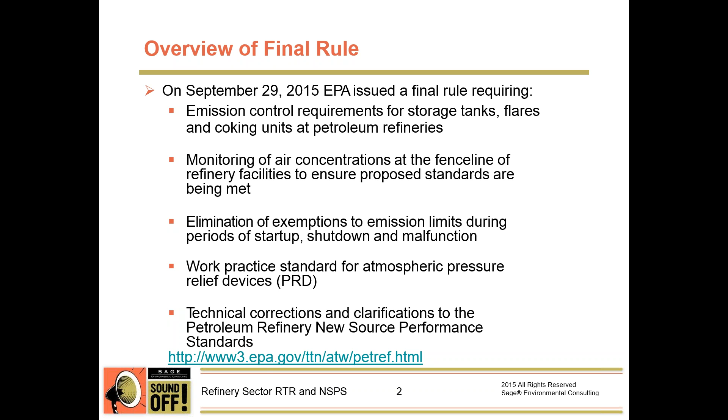Getting into a little more detail, the final amendments to the NESHAP and NSPS are effective 60 days after publication in the Federal Register. We have not seen this come out in the Federal Register yet, but we are expecting it any day. The draft rule, or the rule that was signed by the EPA administrator, is what's available to us right now. We expect that to be the exact same thing that comes out in the Federal Register.

For new sources, they're going to need to comply by the effective date of the final rule or upon startup of that new source, whichever of those dates falls later.

Now for existing sources, here's what we're looking at in terms of compliance dates. For delayed coking units and catalytic reforming units, those requirements are going to be 3 years after the effective date, so that's December of 2018. Flares similarly have a 3-year implementation period, due date of December of 2018.

For fence line monitoring, the final rule took a year away from us in terms of implementation. So those requirements now have 2 years after the effective date, so we're looking at December of 2017.

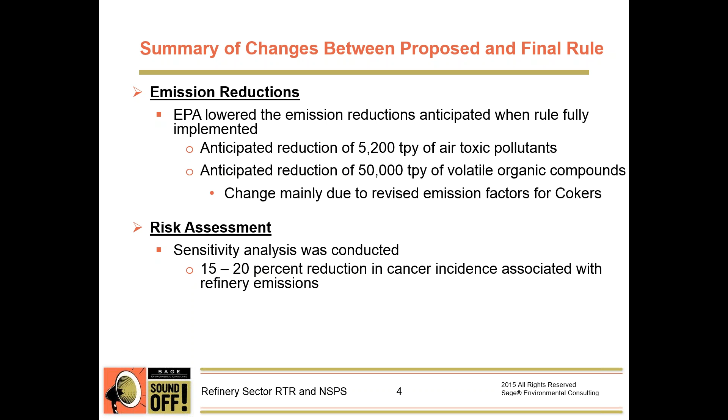On the risk assessment side, there was a sensitivity analysis that was also conducted as part of this. And what EPA has publicized is a 15 to 20% reduction in cancer incidence associated with this rulemaking.

Okay, now getting into the technical details. For flare combustion efficiency, what we now have in the final rule is a single net heating value operating limit in the flare combustion zone. So instead of the multiple ones we were looking at, it's a single value greater than or equal to 270 BTU per standard cubic foot in that combustion zone.

Additionally, EPA did allow the use of the higher adjusted hydrogen heating value, 1212 BTU per scuff, if there is a system to monitor that hydrogen.

Also, we can choose either a 15-minute feed forward or a 15-minute block average to demonstrate compliance for the flares as well. Additionally, what was finalized was limited sampling provisions are allowed to demonstrate compliance for flares that have non-variable flare gas compositions.

For delayed cokers, we're allowed to meet the 2 psig across the coke drums within all existing delayed coking units at the facility. The important part here is for existing delayed coking units, we're allowed to use a rolling 60 event average limit basis to meet that 2 psig across all of the coke drums. Now for new sources, any new delayed coking units, the MACT floor was set at 2 psig on a per coking cycle basis. So for those, we do not have the option for the facility-wide averaging, it's specifically just a per coke cycle basis.

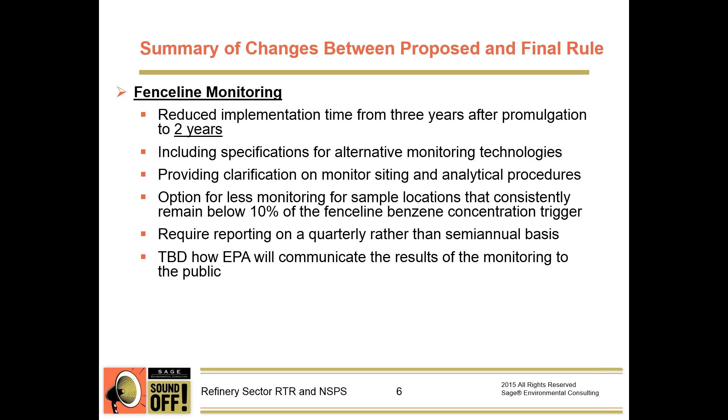This does require reporting now on a quarterly rather than a semi-annual basis, and it's still to be determined how EPA is going to communicate the results of this monitoring to the public. So that'll be interesting to see how that unfolds. EPA discussed that they want input on how this should be communicated to the public.

For storage tanks, the EPA has finalized option 2 of the June 2014 proposal. What that requires is guide pole controls and other fitting controls for the existing external or internal floating roof tanks. These requirements are structured based on the generic MACT for storage vessels, which comes from 40 CFR 63 subpart WW. Additionally, they've revised the definition of Group 1 storage vessels to include smaller capacity vessels and storage tanks containing materials with lower vapor pressures. So essentially encompassing a greater group of storage tanks into that Group 1 category.

The rule also has the elimination of our malfunction exemptions. Work practice standards have now been established for pressure relief devices and emergency flaring. This includes proactive requirements, better controls on the process, instrumentation, operator training, staged relief, and then also will require changes in operations and practices rather than building more flares to control releases. Essentially, they said we don't want more flares, we just want better control of our malfunction emissions.

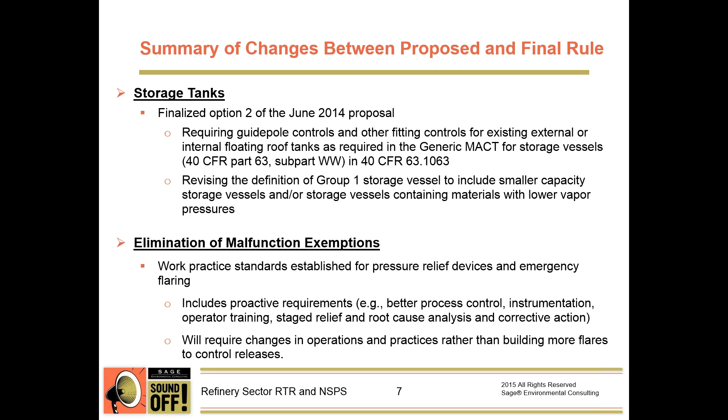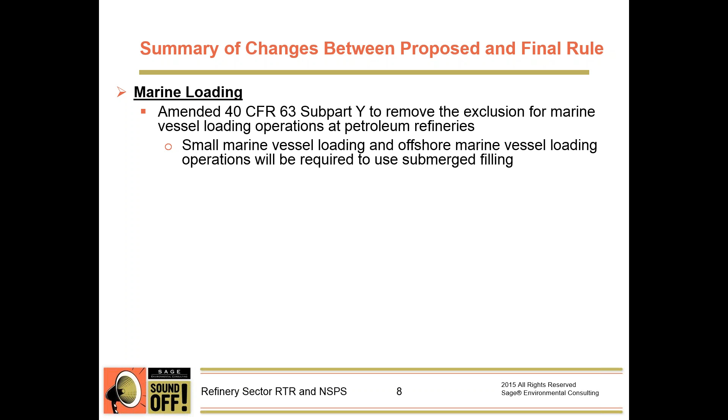And then last here we got marine loading. For any of you that have marine loading, they amended 40 CFR 63 subpart Y to remove the exclusion for marine vessel loading operations at refineries. So small marine vessel loading and offshore marine vessel loading is going to be required to use submerged filling. And again, that is at the time the rule is finalized, so 60 days after we see it in the Federal Register.

For CO boilers, it was specified that the fuel gas must meet the fuel gas standards of NSPS J or Ja. And then they added in bag leak detectors as an option to COMS. So anybody that's got some sort of fabric filter control on their cat can use bag leak detectors as opposed to COMS specifically. We also incorporated the total power and the secondary current operating limits for cat ESPs, and requiring daily checks of the air or water pressure to the spray nozzles on jet ejector type wet scrubbers, or other types of scrubbers that have the atomizing spray nozzles as well.

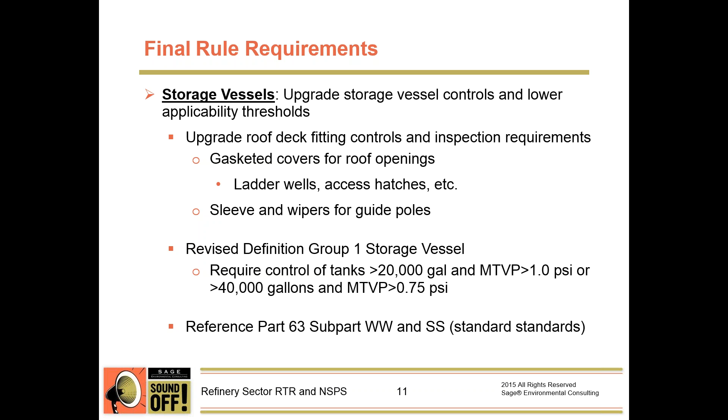All right, so for flares, we've got quite a bit that went on for flares here. It removed cross references with 63.11, and then will operate with a pilot flame at all times regulated material is sent to the flare, and 1 minute with no pilot flame in a 15-minute period is a deviation. And then it did not require the proposed automatic reignition capability for pilots, but you must continuously monitor for pilot presence.

And then you've got to specify the smokeless design capacity and operate with no visible emissions. That's what VE is there. It allows for 5 minutes in any 2-hour period when regulated material is sent to the flare and below smokeless design capacity. And then you can have once per day 5-minute Method 22. And then if visible emissions are observed, you must perform a 5-minute Method 22 and continue for 2 hours if the visible emissions are observed for more than 1 continuous minute. And then it added the capability to use video monitoring in lieu of Method 22 determinations.

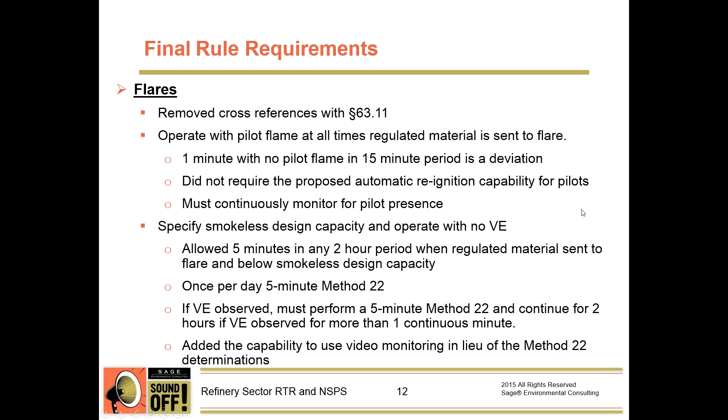So we've got some more flare tip exit velocity requirements. When regulated material is sent to the flare for at least 15 minutes and less than the smokeless design capacity, you've got to operate at less than 60 feet per second, or the calculated V less than the Vmax.

And then combustion zone operating limits, the net heating value of the combustion zone has to be greater than 270 BTUs per scf on a 15-minute block average period. And then the gas must be routed to the flare for at least 15 minutes. They didn't finalize any lower flammability limits or combustion zone content parameters. And then this includes the ability to utilize the 1,212 BTUs per scf for hydrogen.

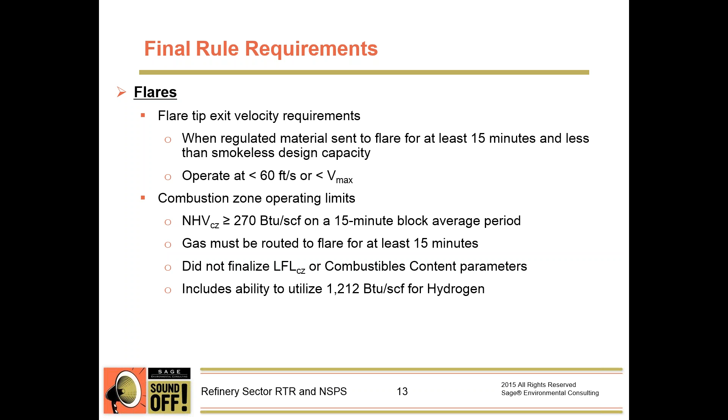So some more on flares. The dilution operating limits for the flares with perimeter assist air. The net heating value dilution parameter has to be greater than 22 BTUs per square foot on a 15-minute block average period, and the gas must be routed to the flare for at least 15 minutes. And then you've got to monitor the composition of the flare vent gas or directly monitor the net heating value, and the potential for separate hydrogen monitoring.

So you need a measurement at least once every 15 minutes. You can utilize a grab sample every 8 hours, or you can do direct monitoring. It's not required for purchased pipeline quality natural gas streams or streams determined to be consistent in composition. And that can utilize a feed-forward method or a direct calculation method.

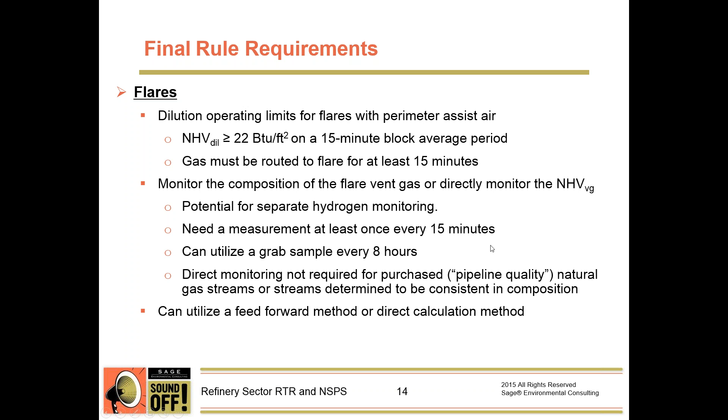So some more on flares. There's a requirement to install a volumetric flow rate monitor on the flare header as well as any supplemental natural gas used. So by installing the volumetric flow rate monitor on assist air or assist steam, you need to separate the monitoring for premix and perimeter assist air, and then you can use a fan speed or a power fan. You can use the curves for that.

Must correct for temperature and pressure to standard conditions, so 68 degrees F and 1 atmosphere. And then mass flow meters can be used, but there are some caveats to when they can be used. And then pressure and temperature monitoring with engineering calculations can be used. And then the accuracy requirements for NSPS Ja and MACT CC were made consistent with the consent decrees. So 20% between 0.1 to 1 foot per second and 5% above 1 foot per second.

So under the emergency flaring provisions, you're operating above the smokeless capacity. You have to develop a flare management plan very similar to the FMPs required for NSPS Ja that is due next month. The root cause analysis and corrective action requirements apply when flow rate exceeds the smokeless capacity. So what would require this is visible emissions present for more than 5 minutes in a 2-hour period, or you have a 15-minute block average flare tip velocity that exceeds the maximum flare tip velocity. And then there is an alternative means of emission limitation and a CPMS monitoring plan.

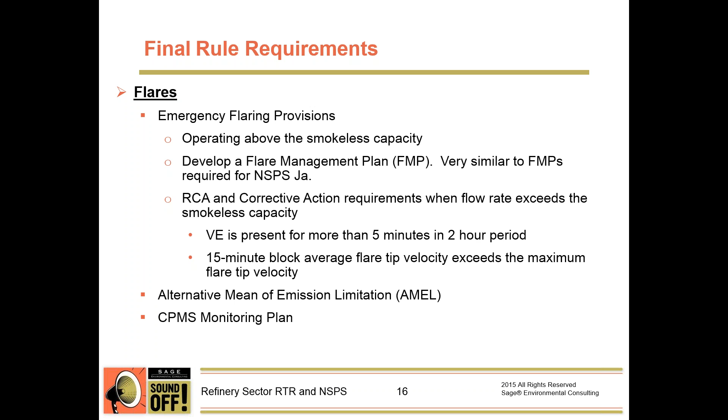So we'll jump over to a couple of the other sources. Flares did take up a major portion of that. But under delayed cokers, they do not allow emissions to the atmosphere from the steam vent until the drum pressure is below 2 PSI. They did allow averaging to meet the 2 PSI across existing coke drums at a facility. That is, again, on the 60 event average limit basis.

The new source MACT floor will be 2, so any new cokers will have to be below 2 PSI. And there's no facility-wide coke drum averaging period. And then the revised refinery emission factors and costs are based on the additional info that was received during the ICR. And then the catalytic reforming unit vents, so vessel pressure limit exclusion of 5 PSI to apply only to passive depressurization. And then their active purging of the CRU will need to meet the emission limitations in Table 15 and 16 in subpart UUU at all times regardless of pressure.

So the fence line monitoring was probably one of the most commented on sections of this rule. I would say that EPA did look into some of the comments and disagreed with a lot of the comments, but we'll go through what some of the requirements are. So you have to deploy passive monitors surrounding the refinery at the fence line. Use a 2-week average concentration reading, calculate the annual average benzene concentration, and compare that against an action level, which is 9 micrograms per cubic meter. You have to conduct a root cause analysis and corrective action upon exceedances of the action level.

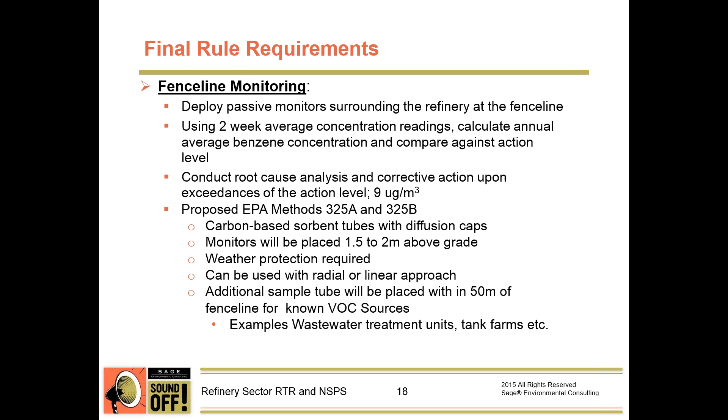So the primary requirement for the monitoring system is that it provides adequate spatial coverage for the determination of representative pollutant concentrations at the boundary of the facility of operation. A proposed monitoring program would require the monitors be placed at 15 to 30 degree intervals along the perimeter of the refinery depending upon the size. So EPA has kind of broken down what is small, medium, and large facilities. So they consider a small facility less than 750 acres, which would roughly equate to about 12 locations for monitoring. And then a medium facility, somewhere 750 to 1,500 acres, should be placed at 20 degree intervals, which equates to about 18 locations around the facility.

And then large facilities greater than 1,500 acres, the monitors should be placed at 15 degree intervals, accounting for roughly 24 locations. Alternatively, the monitors can be placed every 2,000 feet along the fence line of the refinery, which may be easier to implement, especially for irregularly shaped facilities. So I know when there were some pilot studies done, it was hard to distinguish where exactly to place monitors, so this is where this alternative siting procedure comes in.

So before I jump into the startup, shutdown and malfunction, the fence line monitoring, as we've talked about, does take into account the fact that you can reduce the monitoring based on how long it's been since you've had an action level hit. And so it's roughly every 2 years you get to begin skipping cycles. So if you go 2 years with no hits above the action level, you get to skip every other period. And then if you go 2 more years, you end up in quarterly. So you're only doing 1 sample per quarter. If you go another 2 years with no hits, you end up in semi-annual. And then if you go another 2 years beyond that with no hits, you end up in just an annual sample.

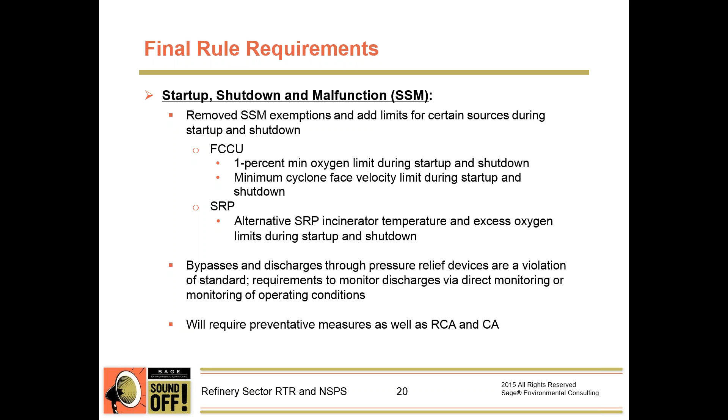So this will require preventative measures as well as an RCA and a CA, which is root cause analysis and corrective action there. So equip each PRD in organic HAP service with a device or use a monitoring system that is capable of identifying the pressure release, recording the time and duration of each pressure release, and then notifying operators immediately that a pressure release is occurring.

And so that footnote there is that new affected sources are required to route all atmospheric PRDs via a closed vent system to a control device, but that requires that the new units being built have more than 25 tons of HAP total or 10 tons of one HAP, so they have to be a new major source in and of itself. So that doesn't mean that if you build new units within a refinery and you don't trigger 25 tons per year of total HAPs or 10 tons per year of one speciated HAP that you would necessarily have to route everything to a closed vent system. You could fall into the work practices.

So the minimum of 3 redundant measures to prevent atmospheric releases, or you can install a closed vent system and route to a flare, drain, or other control system. So examples of preventative measures include flow, temperature, level and pressure indicators with dead man switches, monitors, or automatic actuators, documented routine inspection and maintenance programs, inherently safer design or safety instrumentation systems, deluge systems,

and then staged relief system where initial pressure relief valve with a lower set release pressure discharges to the flare or other closed vent system and a control device, so you can stage, say 2 psi, 4 psi, for example, which relief valves would go to the flare and then what would go to atmosphere. And then root cause analysis conducted on all release events for each PRD.

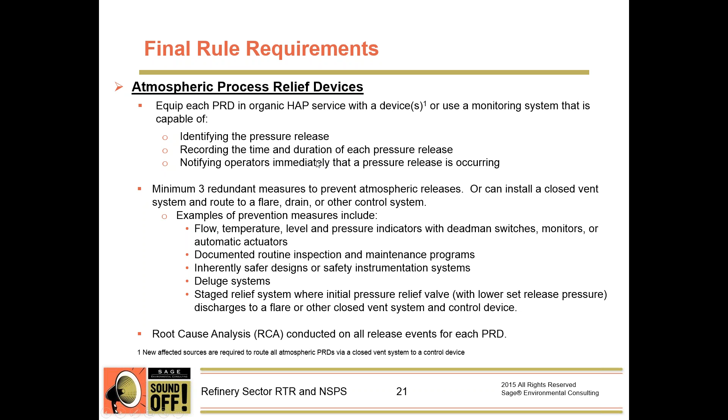So there are some exempted PRDs in the rule. Some of these: the potential to emit is less than 72 pounds per day. The design release pressure is less than 2.5 psi. The PRD is in heavy liquid service. It is a thermal expansion relief valve, or the liquid PRD is hard piped to controlled process drains. And then if the PRD is located on mobile equipment.

So violations of the work practice standard: if the root cause was found to be operator error or negligence, that would be a violation. If you have 2 release events in a 3-year period, not including a force majeure, of the same PRD, if the root cause is the same, that would be a violation. And then if you have 3 release events in a 3-year period, not including force majeure again, of the same PRD, even if the root causes are different.

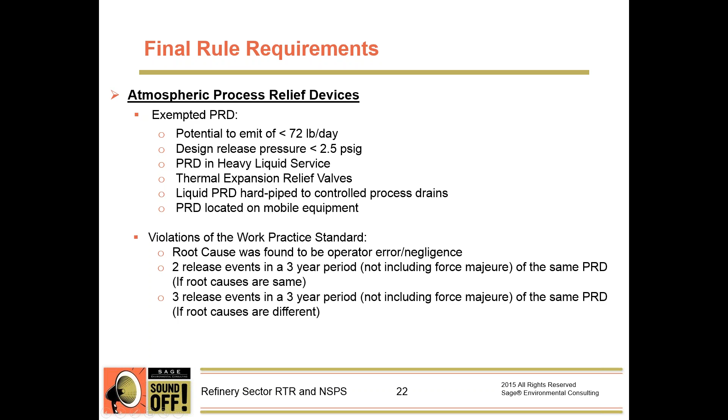All right, with that, I'm going to hand it back off to Taras for some of the capital cost discussion. All right, thanks, Blake. So kind of concluding this presentation, we just hit you with a lot of technical details. Now what we wanted to focus on is, okay, what's the capital cost impacts that are associated with this? Really because we know refinery management wants to know budgets, and they want to know it now for the next 3 years, and so we need to do some digging in order to figure out on a refinery specific basis what the true costs of this are actually going to be.

So from EPA's perspective, they estimated the final rule is going to be about $283 million for all of refineries. 112 million from the final amendments, and then 171 million from the standards to ensure continuous compliance with them. EPA estimated the annual cost to be about 63 million, and that includes 11 million credit for recovery of lost product that they are saying we're going to get with this regulation.

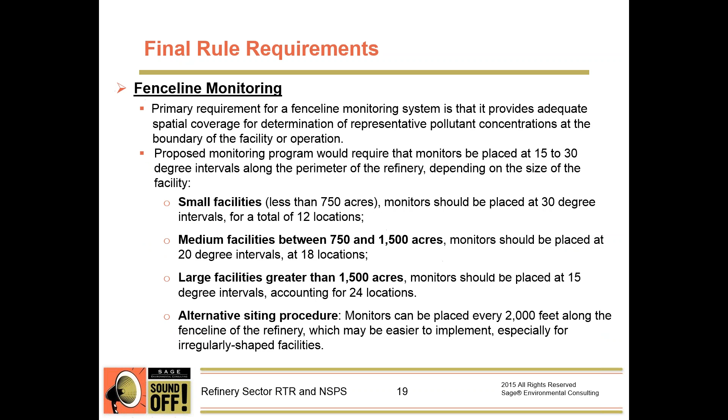So specifically for the delayed coking units, what EPA said is, okay, we want the coke drums depressured to a closed blowdown system until the coke drum pressure is at 2 psig. Now what they've said is that this will be accomplished by installing and operating steam ejector systems to reduce the coke drum pressure prior to venting. So their cost estimate said for a certain percentage of refineries, they're going to need to install some sort of steam ejector system to get down to that 2 psig.

I don't know exactly how they got that number, and that's why I said I don't feel perfectly comfortable with that 81 million that they came up with. Additionally, beyond steam ejector systems, EPA said we might need some additional engineering in order to get down on another percentage of these cokers, and so that added an additional cost beyond just the steam ejectors. But again, I just don't feel comfortable with how they came up with that number, and so I really think there needs to be a refinery by refinery review to specifically go through that and figure out what the cost for that control is actually going to be for them.

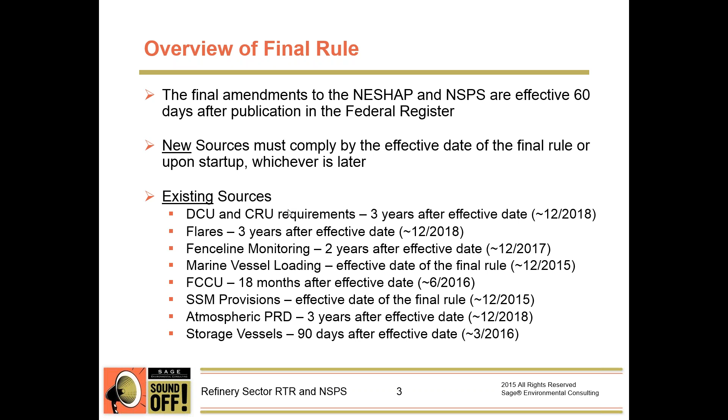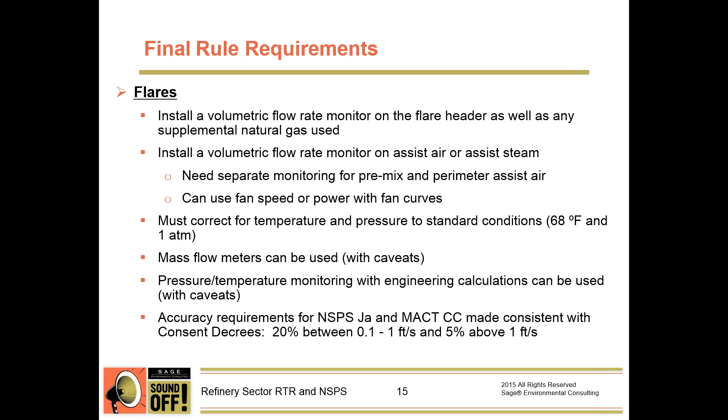And it looks like I got another question here for delayed cokers. The question is the coker pressure limit 2 psi or less than 2 psi? So 2 psi is the limit itself, so it should be below 2 psi. And that's equal to or less than 2 psi, and that's psig. I just want to make sure I specify pounds per square inch on the gauge.

I see a question, is the $283 million estimate per refinery? That's actually what EPA's estimate was across industry. That's not per refinery.

Yeah, and that again we feel is very much underestimated. I believe AFPM has actually put that number possibly above $1 billion. Right.

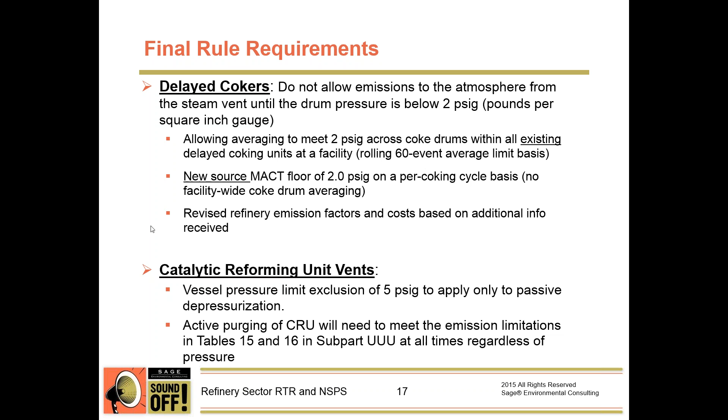Okay, then I've got another question here for the FCCU requirements that we had touched on. The question is, are these changes to MACT triple U or to NSPS JA? The answer is it's actually both. So there's some MACT triple U changes, and then in order to make sure that the rule agreed with when it references J or JA, they made changes to J and JA as well. So this changes MACT triple U, MACT CC, as well as J and NSPS J and JA.

Yeah, and I got another clarification, so Blake caught it on our slide there as well. Implementation for the CAT testing is an 18-month window, so that's going to be June of 2017, not 2016 as I had in there.